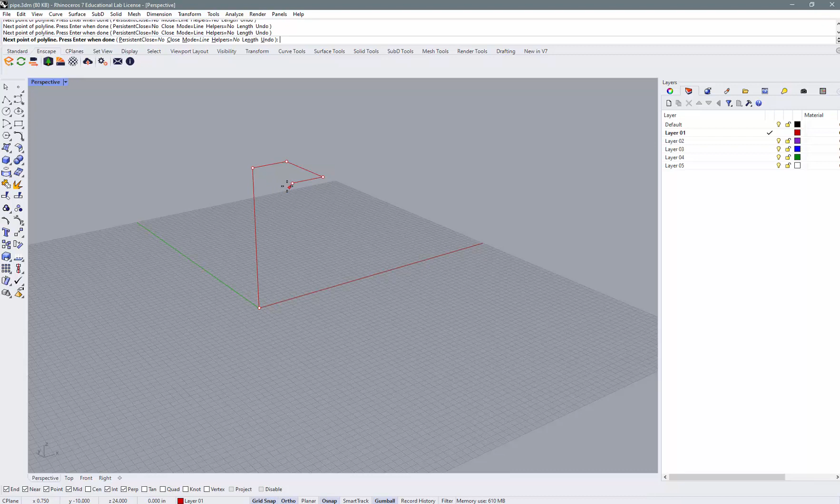Once you get to that, you can draw around using the ortho however you want. And if you want to go down, hold down the control key and you can go down. I'll go down like 12 inches, and then maybe over and back, and maybe down again 6 inches, and then maybe over and up.

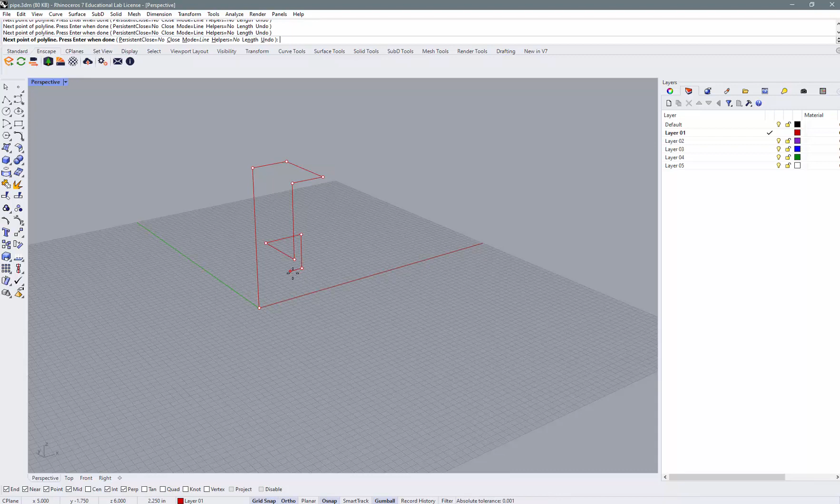So I'll control click that again and go up, and then enter to stop that. And if we look around, we've got that guy, right?

Then what you can do if you want is come in and fillet these. So if you use the fillet command, set it to whatever radius you need, that's going to be the radius of your pipe. I'm using 0.25, doing a 1/2 inch pipe. You can do 1/2 inch or 3/4 inch for water supply, and like 3 inch for PVC waste sanitary.

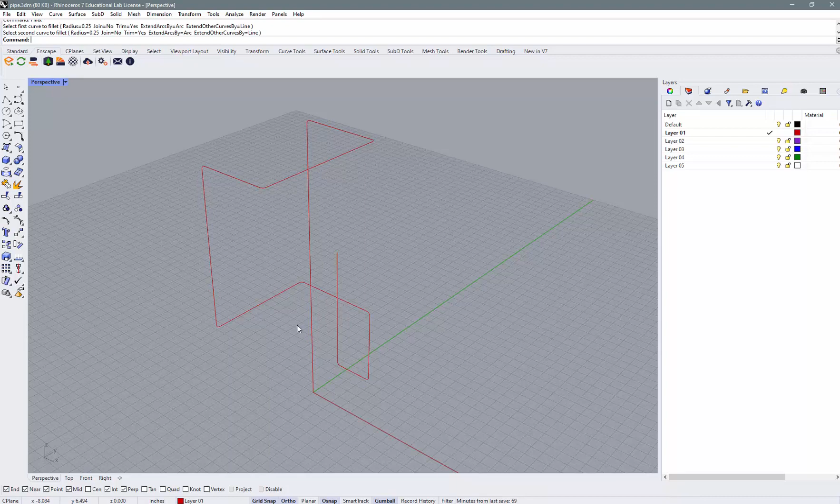So I'll leave that fillet at 0.25, and if I come in and click, it'll start, and I'll hit enter to repeat that command. Click and click, enter, click and click, enter, click and click, enter, clicking on each of those to get it to fillet. Just work my way around until I'm done, and then I can pipe it.

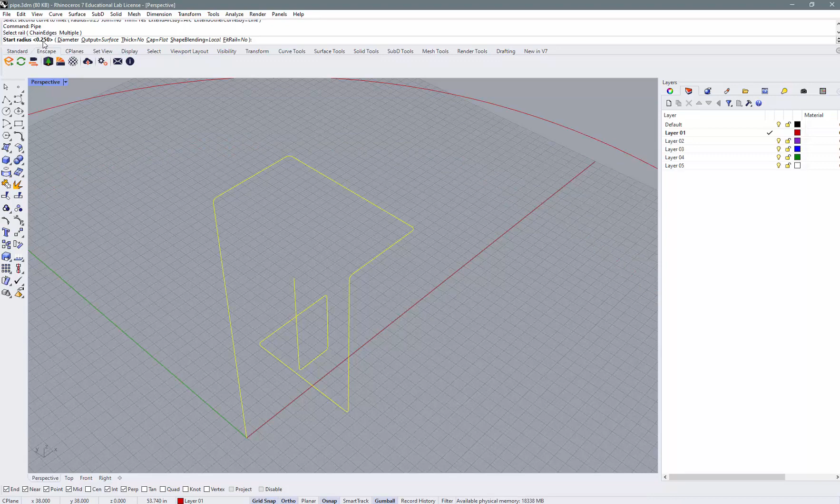So I'll come in and type pipe, enter, and select the rail. That's my rail. Then it wants you to set the radius, so you should use pretty much the same radius you used for the fillet. If you're doing a 1/2 inch pipe, if it already says 0.25 like mine, that's great, or you can enter it and it will do it.

I'll hit enter and it'll set the first point, then if I hit enter again, it'll set that end point, and then I hit enter again and it'll pipe it. So now I've got that pipe in here. That works, so you can use this and bring it into Revit as a solid, or you can come into Revit directly.

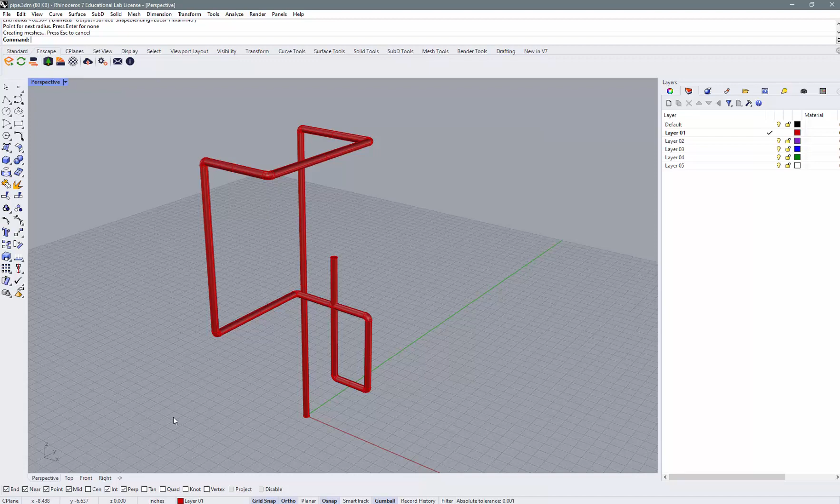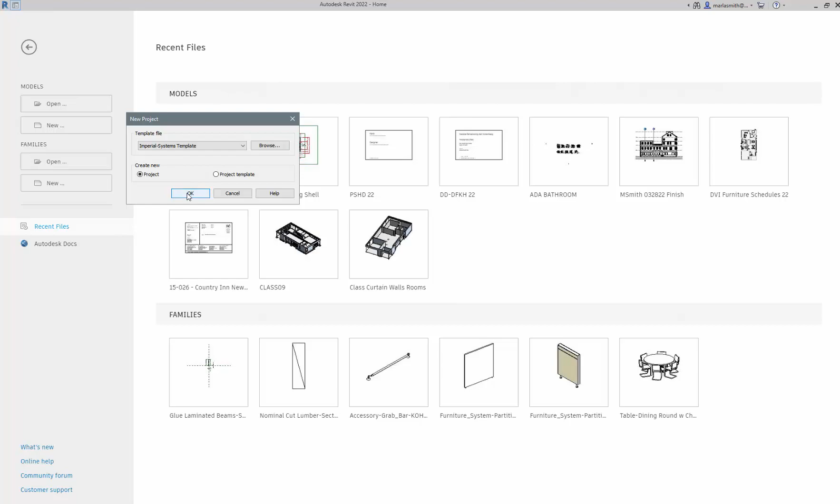So if I go into Revit, I'd suggest you play around in an empty file first. I'm going to go to new and use the Imperial Systems template because it has all the fittings I need for the pipe. The architectural template doesn't. So I'll come in here and go to 3D.

If you go to the Systems tab, you have pipe. If you click on pipe, you can set the diameter here, I'll set it to 3/4. It's going to start at a middle elevation of 9 inches, so I'm just going to start at 1 foot.

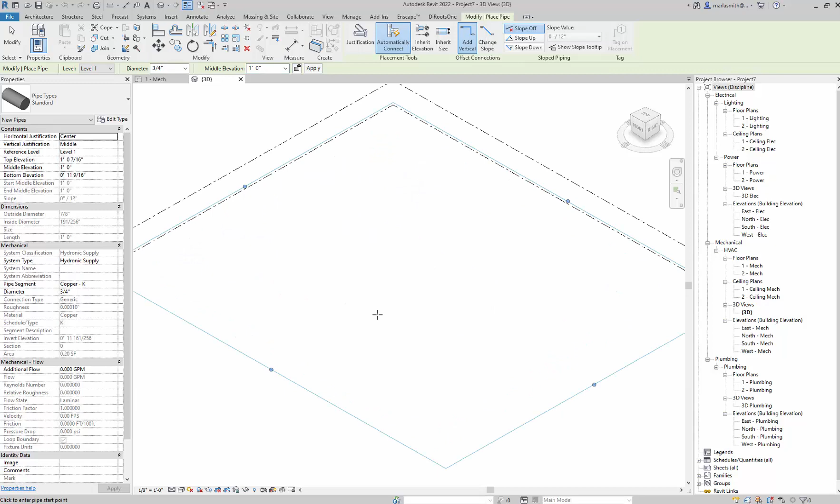If I come in and left click, it'll start drawing that at 1 foot. Now if I want it to go up vertically, I need to change the elevation. So if I come in here and type in like 2 feet, it'll pop it up 2 feet, and then I can start drawing.

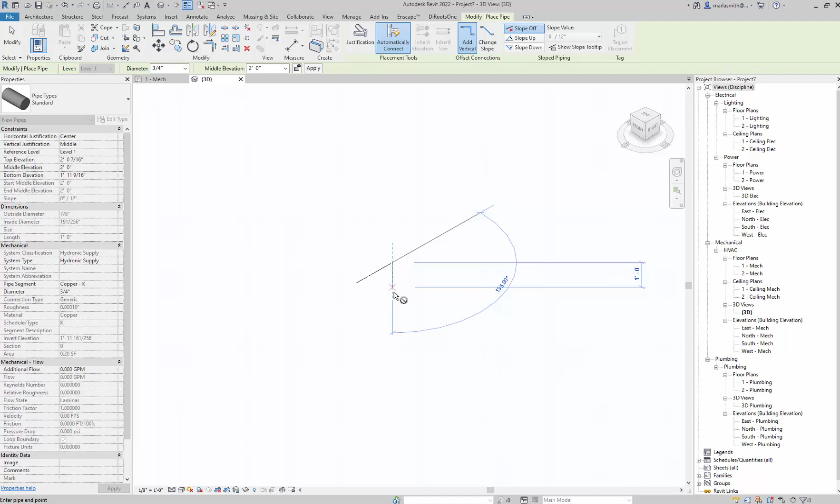And then if I want it to go down to 0, I can type 0, and now that's down at 0. Then I can draw over, and then I can tell it no, I want to go up to 4 feet, and it'll go up to 4 feet. Then I can start playing around with it.

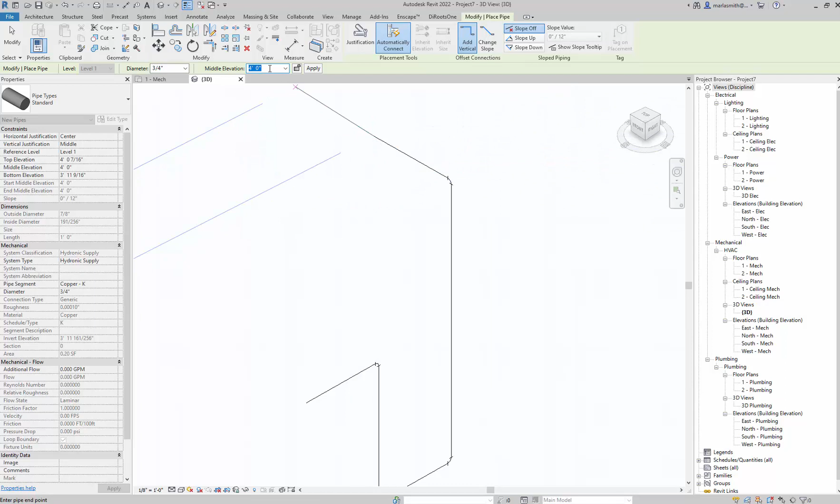And then you can see it's putting a fitting on it a little bit, you see that curve it's putting on? Then I'll come down to maybe 2 feet again, so I'm back at 2 feet, and then I'll come over and maybe cross this one. If I hit escape a couple times, you can see it's actually putting these little fittings in when I turn the corner.

It's showing a line because I'm in medium detail. If I go to fine, you can see it. And then when you draw it, you can also see it.

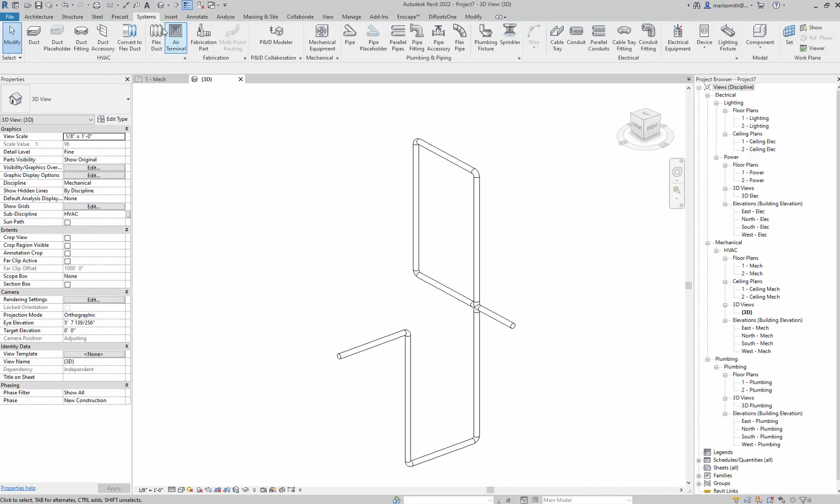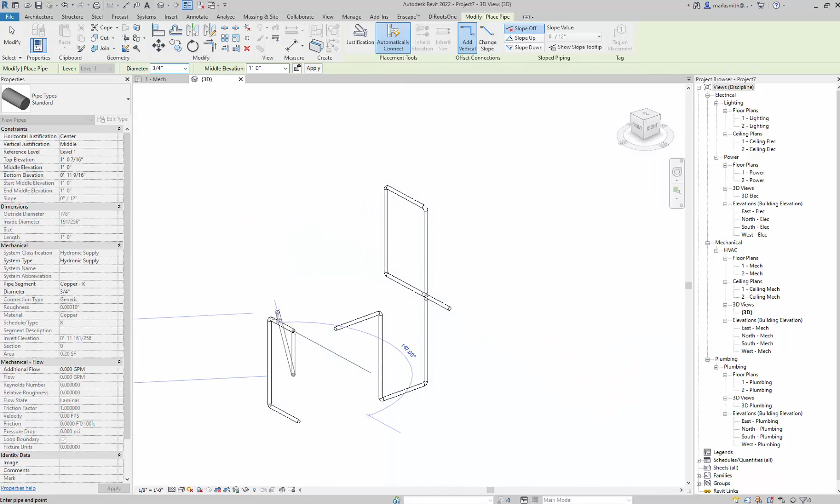So if I come in and set this to 0, I'll just start here and maybe draw out there and go up to 2 feet, and then over, maybe down to 1 foot, and then maybe over. I'll keep that one simple, and then escape a couple of times.

And so you've got that. If I go to my shaded mode, it shows it there. If I go to realistic, it shows the pipe, the water supply pipe in copper, but the fittings are not.

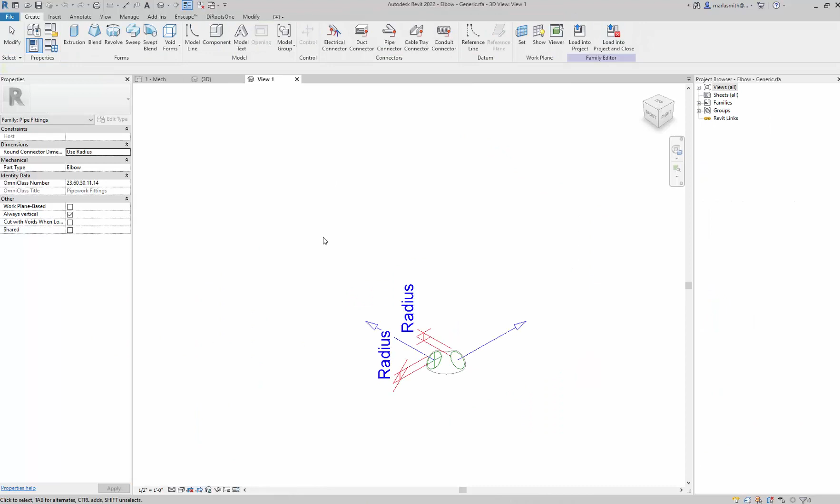If you want to be able to put a material in the fittings, you have to select them and edit the family, and then pick the form. So I'm picking that little form right there.

And then I'm going to put a material parameter on it by associating a family parameter, clicking on this gray box, going to new, and typing in elbow mat, then click OK and click OK.

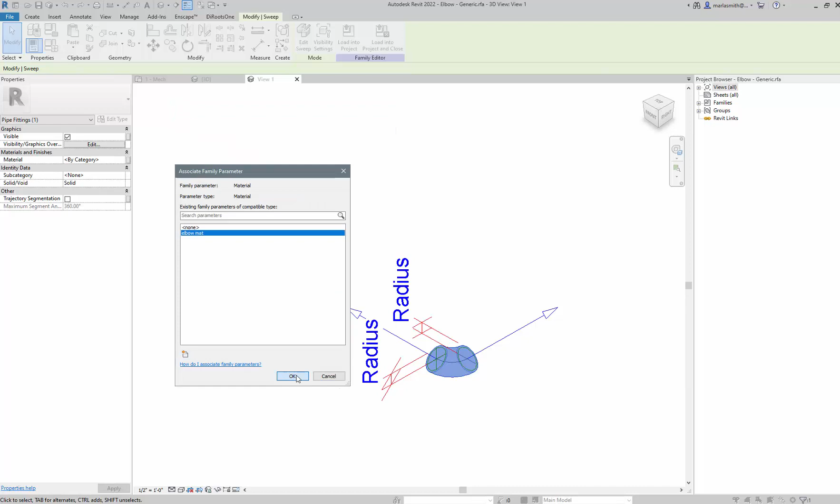Then I'm going to load that into the project, overwriting the existing version. And then when I pick that, I can go to edit type, and that elbow mat will be there, and I can come in and change that to copper, click OK, click OK, and then it changes all those to copper.

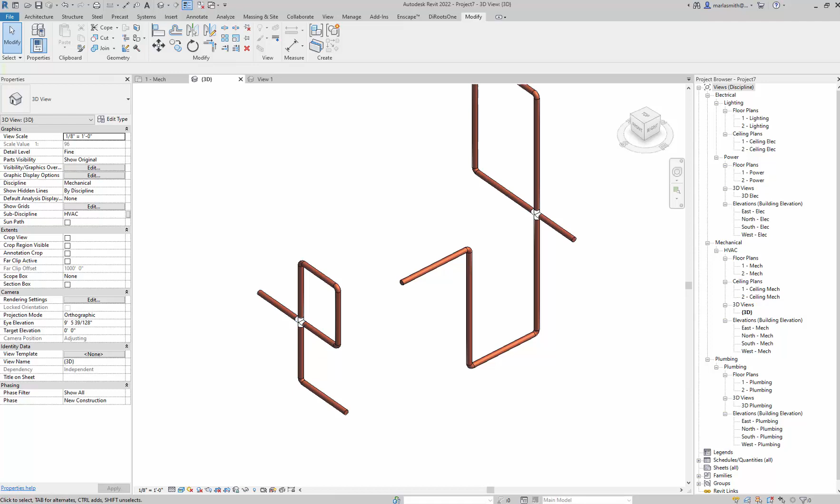You'd have to do the same thing to each individual fitting as they come in. When I come back, we'll open up an architectural project and do it in there.